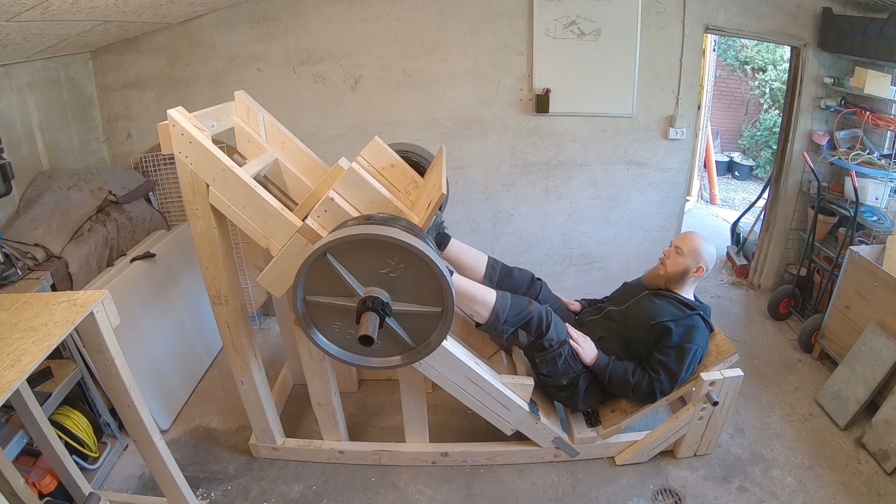Alright guys, in this video I'm gonna show you how I built this wooden leg press.

Before I get into details on how I built this leg press, here's some advice. This is made of wood, a DIY project I made here in my workshop. Since it's made of wood, it won't handle the same amount of weight as one you'd find in a commercial gym. Right now I've got 160 kilos on it. I think 200 would probably be no big deal for it, maybe 250, but I wouldn't go above that.

I'm open for suggestions, and since it's made of wood, I will gladly do some improvements on it as far as it's possible. I've done a lot of gluing and screwing together, so it's not possible to take everything apart, but I'll gladly do some improvements. If you have any, please leave them in the comment section down below.

Let's get started. The leg press is probably one of the most popular machines you'll find in big gyms. I haven't really seen that many DIY projects on a leg press. I've seen one well made out of wood, and one or two made of steel, and those didn't really seem to be very strong. Since I've been making it out of wood, I have to make sure to strengthen and reinforce it everywhere possible, because the leg press potentially should carry a lot of weight.

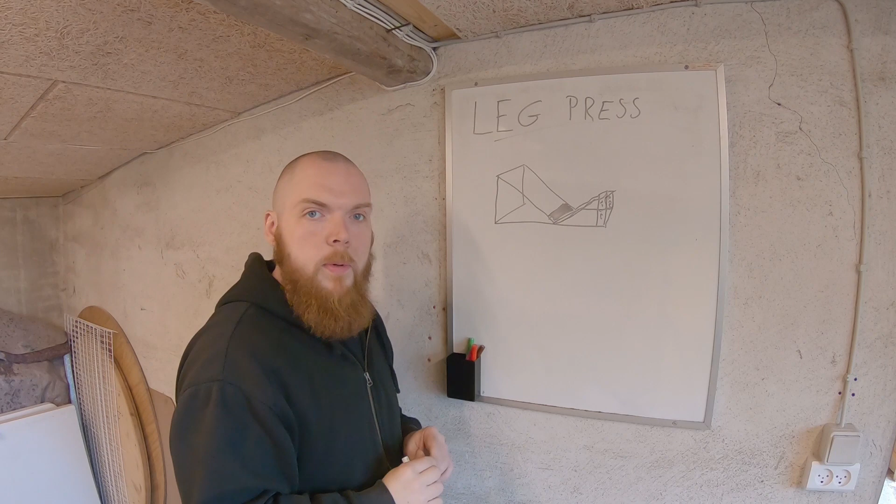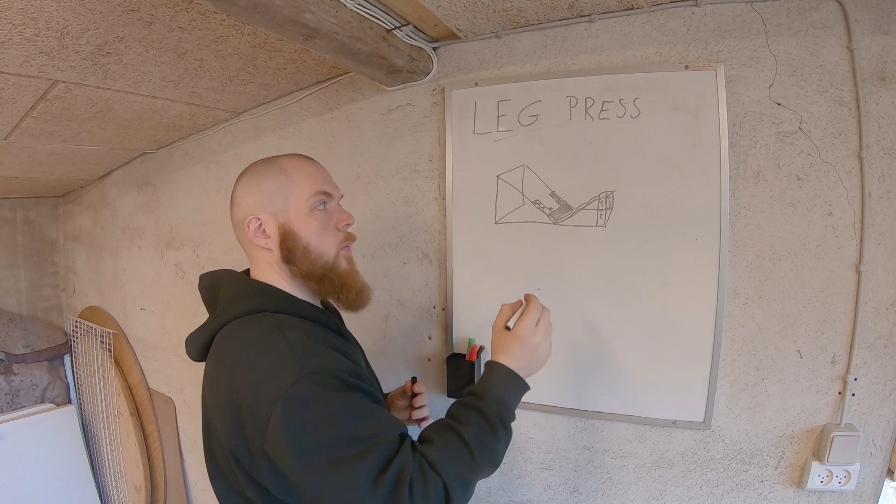Then there's gonna be some start-stop handles, and they'll be hinged so they can open and close, with some kind of handle on them. Then there's the weight trolley itself with a foot plate on it.

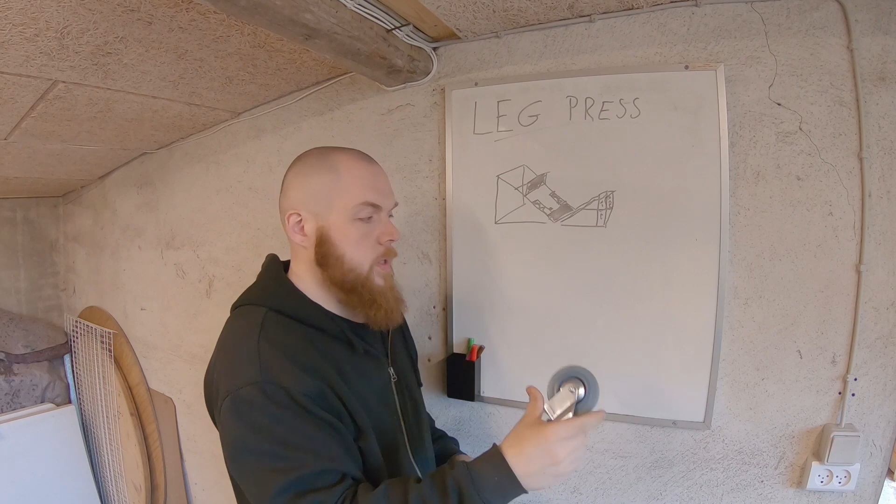My idea is to use furniture wheels. Most commercial ones are made with either some kind of linear bearing, or a pipe that goes on top of a rod, and the weight trolley travels along that. That's a bit difficult to do, first of all with wood, and with just normal hand tools, so it's not going to be that precise - I'm not going to do that. I'll be using furniture wheels, and hopefully that's going to work.

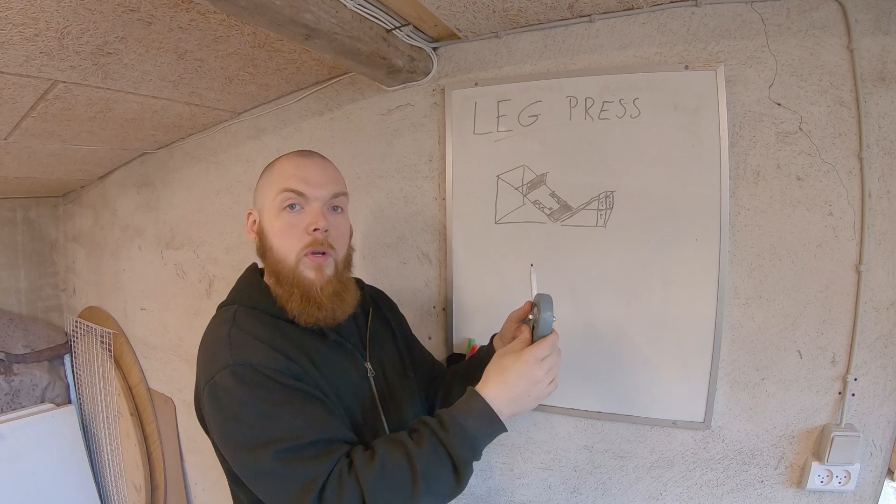I will make some kind of track system so they don't get out of direction, and I'll also somehow make sure the top layer of that trolley is secured so it won't fall off. I need somewhere to put the weight.

I have some 1.5 inch pipe that I'll probably be mounting, not quite sure yet how. I think the best way is to put the weight below the trolley, so it will always be pulling the trolley down, making it safer. For that I'll be having my weights down here somehow - I just have to figure that out.

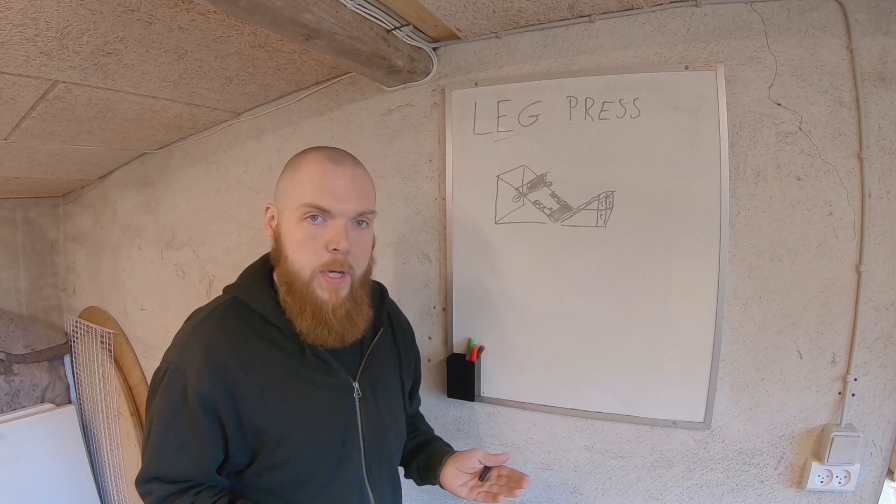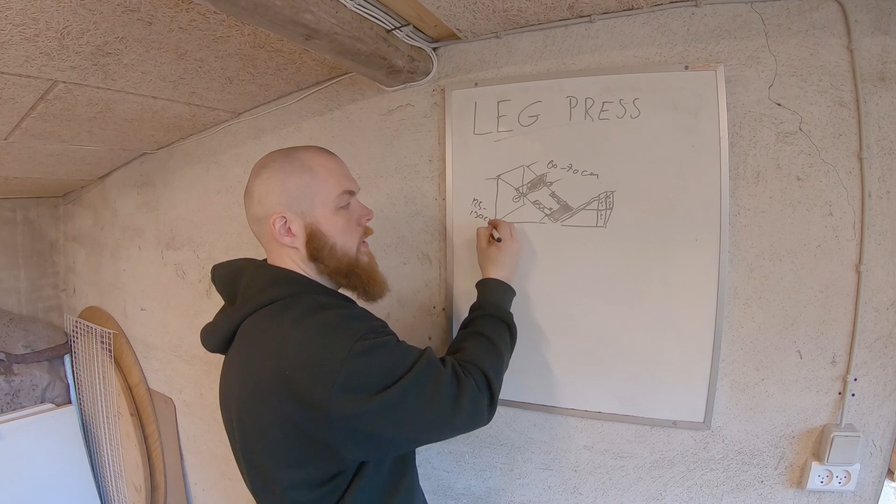So I'll be making all the basic structure first, and then working on the trolley system. I've done some measurements with my squat depth and how much my leg travels when I flex, and based on that I should have around 60 to 70 centimeters of travel distance with the weight trolley, around 125, 130 centimeters total. It's just some estimates, and I'll take a look at it when I build it.

Okay, so the basic frame is completed now. There's probably still gonna be a few adjustments when I put on the weight trolley and the seat and all the things that go on it, and I need to reinforce it. But the basic frame is completed, and I've changed the dimensions a little bit.

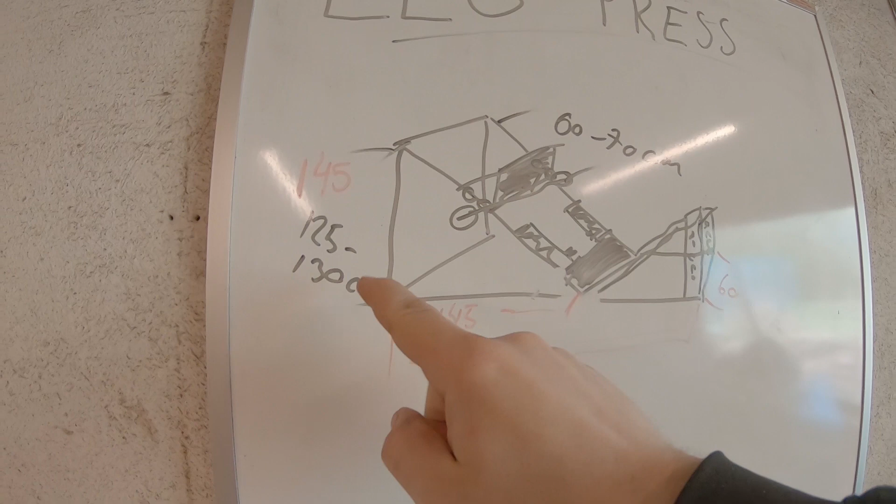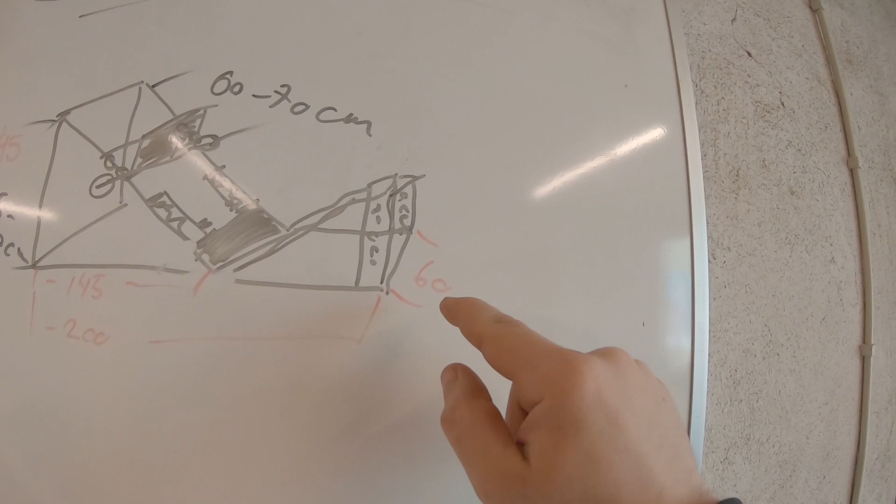So let's take a look at the dimensions. I made the height 145 centimeters instead of around 125 or 130. The total length is 200, and of course this number is the same because then we have a 45-degree angle. The width is 60 centimeters - that might not be a lot, but I wanted it to take up as little space as possible. In case it gets wobbly to the side, I'll extend the legs on the side. Here's how it looks at the moment.

And then my idea about the trolley. I have a furniture trolley here. That's not the one I'm gonna use, but it's just to see how to get an idea.

My idea is that it will not necessarily be completely on this beam, but at least be fixed inside the frame and then slide down. So I'll need to make some kind of plate that the wheels will roll on, and to make it safe, I want a bracket of some kind to come up from the side and then cover the top of it, so to prevent it from slipping out like that.

And then when I've done that, then I'll make the seat and the backrest, and then I'll test it and make sure to reinforce it on the way.

Alright, so the rail system is ready. So the trolley wheel will go in here, and this is to prevent it from slipping out. And the depth of this is just up to the center of the wheel, just below the nut. And it seems to be rolling quite well.

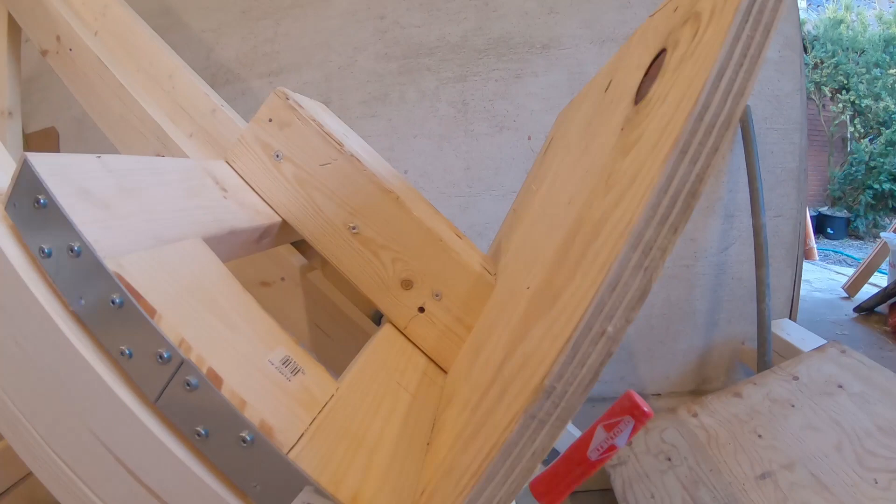This is how the trolley looks. I made a slightly angled foot plate. It's cut with a 15-degree angle. And then after that, I will be making the seat. Right now I'm just having a plate lying there. It's not mounted.

And here's the pipe that I will be using for the adjustment. So that will be mounted on the leg here and go onto the other side, and then I can adjust the height by putting it into another hole. And the last thing will be to reinforce the entire frame, at least the legs.

I will put another piece of wood here on each side. I will put some more wood underneath. This is cut from yesterday, leftover from yesterday, that I could put underneath, kind of like that. So in that case, the safety system screw should only go to here. That will be the last thing, and I will reinforce it as much as I can.

Alright, so I'm almost done. I just need to properly mount the weight trolley in a safe way. But here's an update so far.

I've made a safety system, or the start-stop system. Basically, it's a 2x4 that sits inside the rail that the weight trolley will roll on, mounted with a hinge on each side. Opens and closes like that.

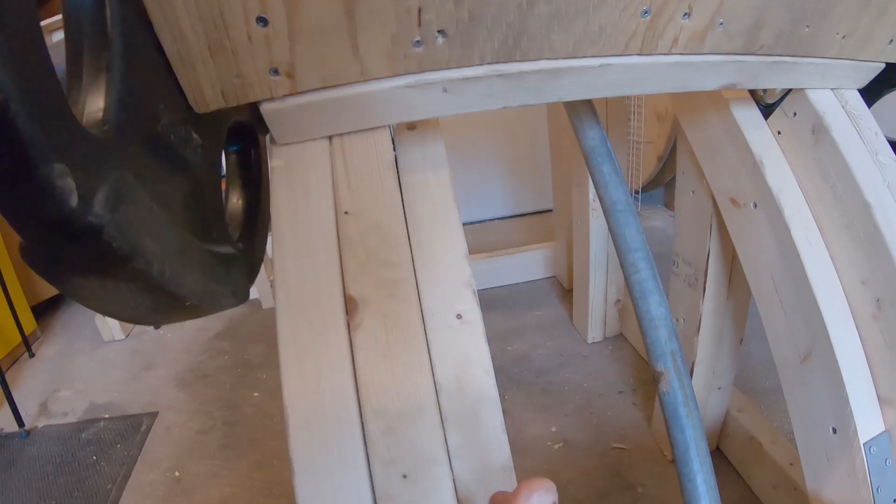Then we have the start-stop system. This is 2x4s that goes in the rail, and then you'll just open and close with the handles. As I said, the width is 60 centimeters, and on the inside it's probably around 40 centimeters. It's a bit narrow, so if you do a similar start-stop system, probably go a little wider, maybe outer width between 70 or 80 centimeters. When I open the start-stop system, there's not a whole lot of space because I go up here. It works for me, I can still be in the machine, but I would recommend going a bit wider.

As you can see on this wheel up here, it just pushes on the lowest wheel on the weight trolley. As I said before, the trolley goes inside a rail.

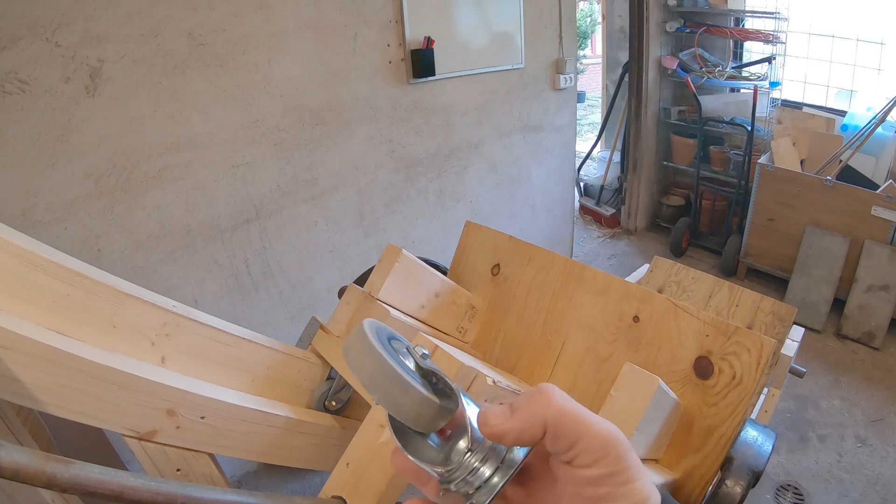Like that. My original plan was to use wheels like this that rotate, because then I didn't have to be that precise when mounting it, but I ended up concluding that didn't work because it needs a longer distance to get in the right position. So I ended up setting 4 non-rotating wheels on it. And again, it's furniture wheels, the most heavy-duty ones that I could find.

The trolley moves up and down along this steel pipe. It's not touching it. The only purpose of the steel pipe is to catch the trolley if the other safety mechanism fails, and the trolley eventually would fall over, then the steel pipe will catch it.

And the pipe is connected at the bottom. Yes, it goes into this hole and then it stops on this block. And up here it just goes through. And on here I just put a bolt through it to prevent it from sliding up. And the other safety system goes on here.

It's just a small wheel that goes on the inside of the frame. This wheel is just supporting, and just in case this breaks, then the pipe will take over.

Everything is made of 2x4 and a few pieces of plywood. And the legs, I've doubled it, so it's actually become a 4x4. And I made sure to put a lot of glue in between those and screw them all together on the inside.